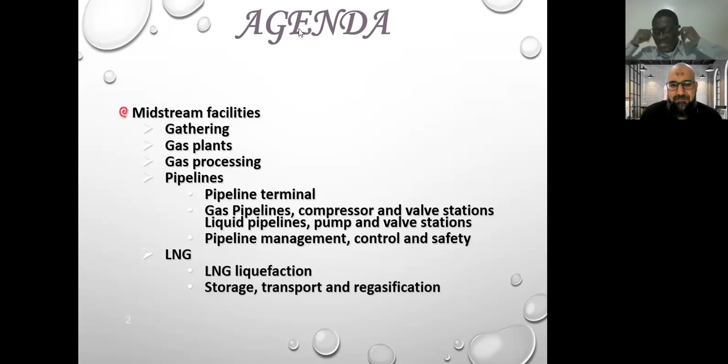Okay, so today we'll speak about the midstream, as I told. In the midstream facility, if you can see in this photo, we have processing plant, we have liquefied natural gas, we have the gas gathering, and we have pipeline in the midstream. So this midstream is mainly about gas processing, gas plant, and the pipeline to carry and transport the gas, and gas manifold and valve manifold, gas station, compressor station. This is all in the midstream sector before going to the final refinery or transporting product for the downstream for the market.

This again is a photo for the midstream sector. As I told you, the gas that is being explored or extracted, it is not a pure gas. So it has some impurities, some components like water and other components that are not useful. So they cannot transport immediately the gas that's coming from the well to the market or to another country. So they have to do some processing. This is mainly the midstream, to do some processing to the gas coming from the well, because it is not a pure gas.

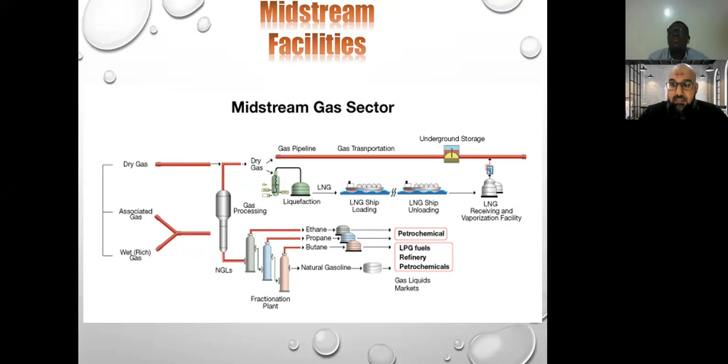So this is what I just explained, that the raw natural gas from the well consists of methane as well as many other smaller fractions of heavier hydrocarbons and other components. So the gas has to be separated into marketable fractions and treated to trade specification to protect equipment from contaminants. So to meet this specification of the gas, they have to do some gas treatment before they sell to the market. So this is all from the midstream sector.

Here, the upstream, if you see this drilling well, and we all studied this one, either we have natural gas or we have crude oil. The natural gas goes through gas treatment. The dry natural gas can go easily to the pipeline and then storage. The wet natural gas needs gas compression, gas processing, because it is unprocessed natural gas. It has some components, so it needs to be processed first.

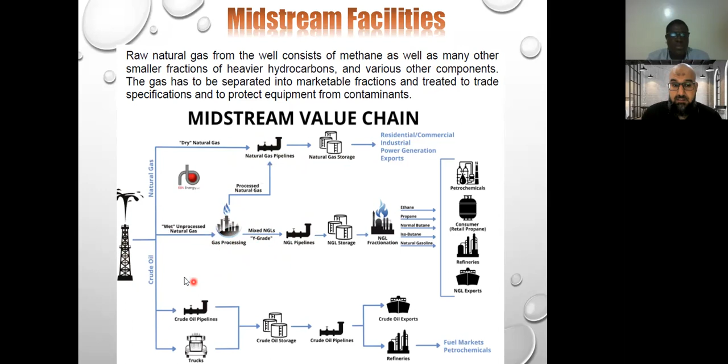So after completion of the gas processing or gas treatment, pure gas will go here to this section, then it will go to the market without any problem. This also happens with the crude oil. So from the well we have either gas or oil. This also happens to the oil, the same philosophy.

So what's meant by gas gathering for the midstream? It means that they have many flow lines connecting together to the well pad. This is to gather all the gas from the wellhead and from the well source, and it will go to the gathering station. This is mainly applied in the first step after completion of upstream and starting of midstream. They start to gather the gas, connecting together.

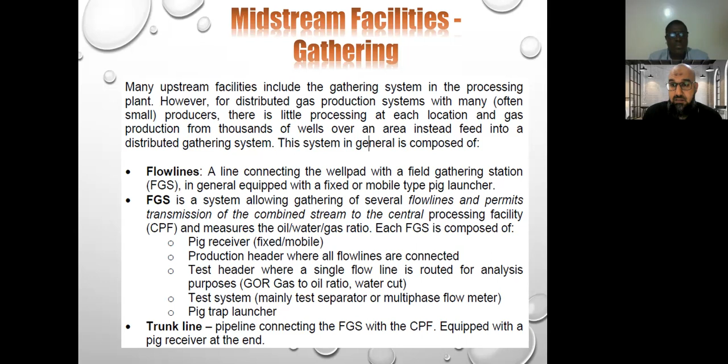They have very big equipment like a launcher, and this launcher is equipment that allows the gas after gathering to be connected into this launcher, then it will be connected to the pipeline. So here is another photo of how they gather the gases from the well. Here is gas gathering by pipeline from the wellhead. This is all connecting from the wellhead, and all of them are processes of gas gathering. Before going to the processing facility, they have to gather the gases by pipeline.

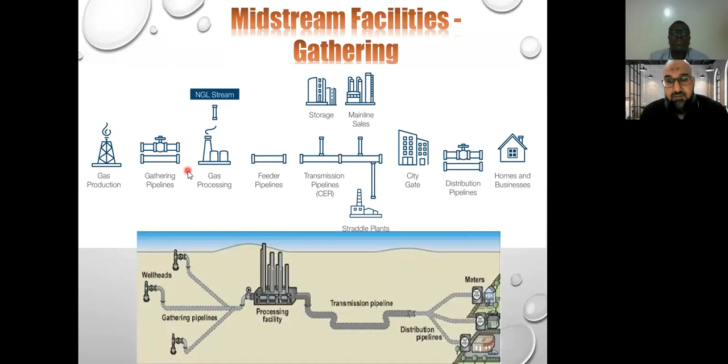So here is another photo. Here is gas production from the well, from exploration. After exploration finishes, then this pipeline is for gathering. After that, they will go to process the gas. So why do we need to process the gas? We have now reached this stage, gas processing. For the next slide, let's speak about the gas plant.

As I told you, this gas is not pure, so they cannot use it. They have to remove the unwanted components. There are unwanted components from the well that already exist in the ground, such as hydrogen sulfide and carbon dioxide. These gases are called acids. So they want to remove them before selling to the market. So this is called gas treatment. In gas treatment, they also do calibration.

Why do they need to do calibration? To meet specific requirements for the market. They need to have some specification of the gas, and to do this, they have to do calibration. So again, the gas treatment or gas plant is mainly to remove the unwanted material like hydrogen sulfide, water, carbon dioxide, nitrogen. All of this unwanted material is not required and does not meet the gas specification required in the market. So they have to remove it and do calibration in the gas plant or gas processing to meet the gas specification requirement.

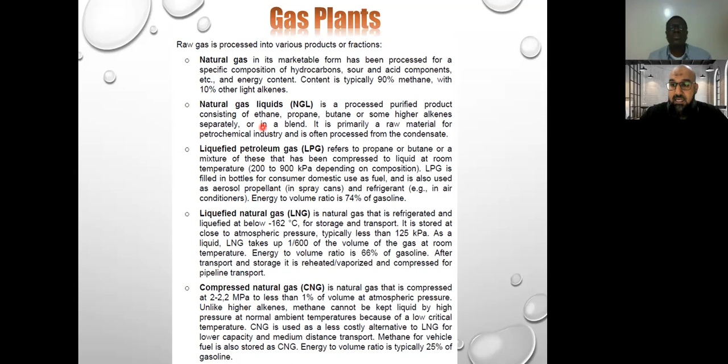So these are the types of product after processing natural gas. We have natural gas, and we have liquefied petroleum gas. This liquefied petroleum gas is what we use in our home, mainly in the kitchen for cooking. We also have liquefied natural gas, and compressed natural gas. So all of these products are finalized after the gas treatment. After you finish the gas plant, you have many products.

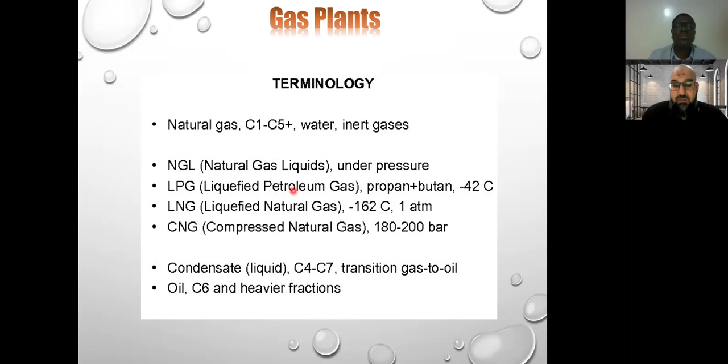As you see, natural gas liquids is under pressure. We have liquefied petroleum gas, which is mainly propane and butane. We have liquefied natural gas, which is under very low temperature; it reaches minus 162 degrees to be liquefied. Then we have compressed natural gas, at 180 to 200 bar pressure. And we have condensate liquid, oil, and other heavier fractions. So this is another photo of the products processed from the gas plant.

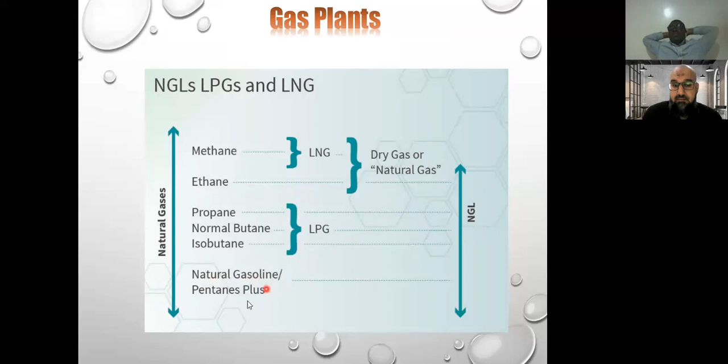As I told you, in natural gas we have methane. This methane can be liquefied to be LNG, liquefied natural gas. We have ethane, propane, butane, isobutane; these are all liquefied petroleum gas. So LPG is liquefied petroleum gas. LNG is liquefied natural gas. NGL is natural gas liquids: natural gasoline and pentanes plus. So these are all the products, as you can see in this photo.

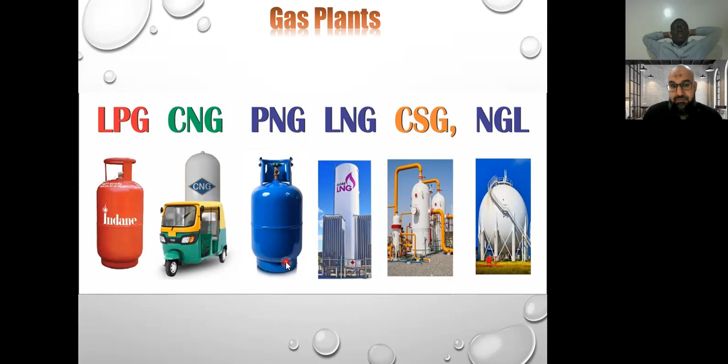The LPG is used in our home. Compressed natural gas is also used in small vehicles or small motorcycles, which in our country they call tuk-tuk. I don't know what it's called in your country. So this uses compressed natural gas. This is liquefied natural gas, and so on.

So this is also another photo of the removal of the unwanted material, the unwanted material that's going to be extracted from the gas.

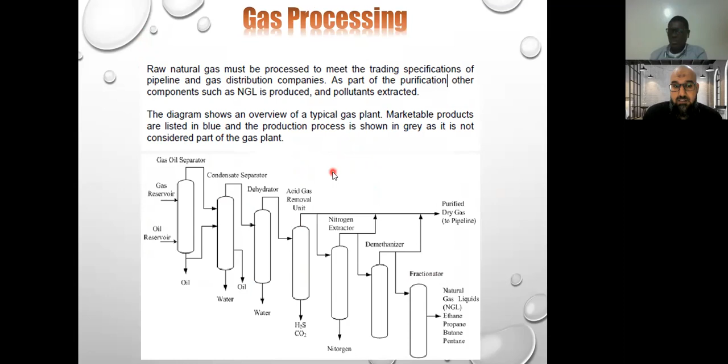Okay, let's have a video that explains the process of the removal of this.

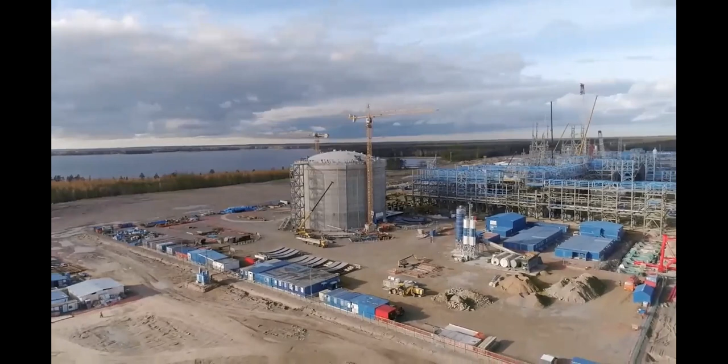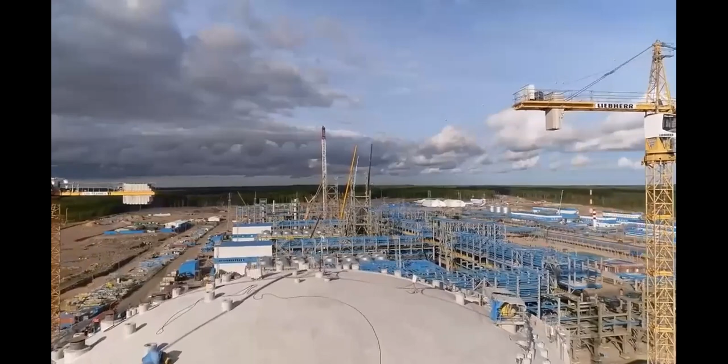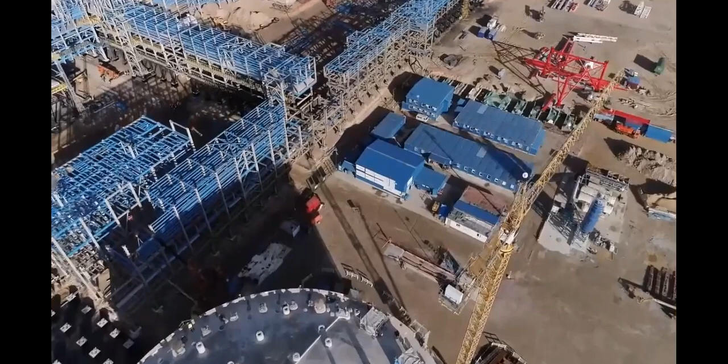Liquefied natural gas technologies from Linde are setting new reliability and efficiency benchmarks. My name is Mark Scheer and I'm Vice President for Business Development and Sales for LNG and gas processing plants. The heart of every LNG plant is the liquefaction technology, together with the main cryogenic heat exchangers. Linde's innovative Limum technology, a single mixed refrigerant process, was selected for a 1.5 million tons per annum LNG project in Russia's northwest region. This is the second largest LNG plant ever designed and executed by Linde. A 1.5 MTPA LNG plant. That means you have to engineer, procure, deliver, ship, and finally stick together probably about 3 million parts in less than 3 years. That's a huge challenge. My name is Matthias Brüntrup and I'm a project director.

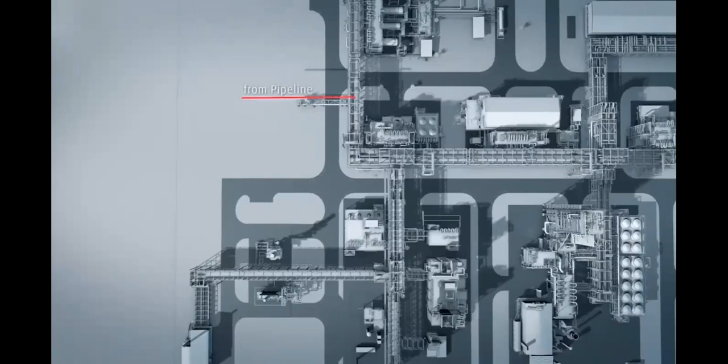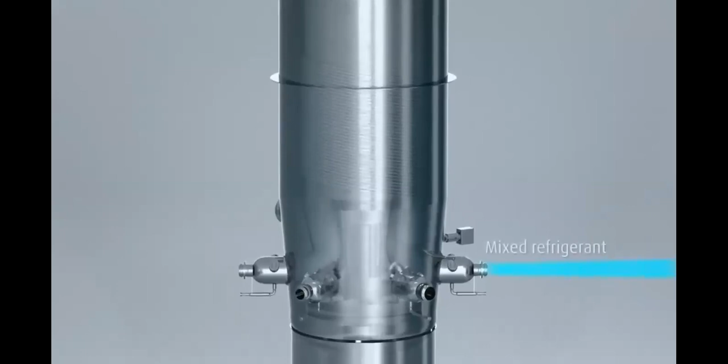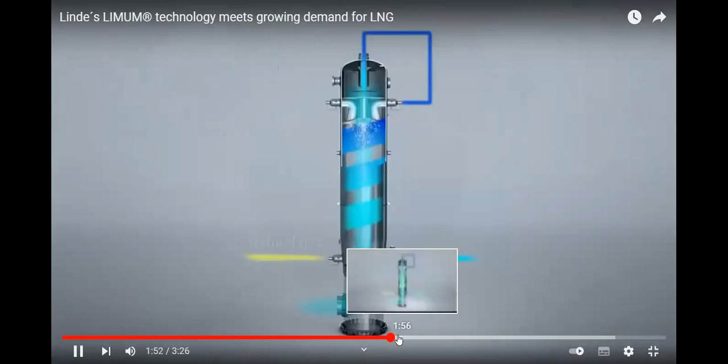Pipeline natural gas is fed into the plant. Various impurities and heavy hydrocarbons are removed first. Then the clean gas is liquefied using Linde's highly specialized and efficient Limum technology. It's like a big fridge in your household, only much larger and colder. My name is Heinz Bauer and I'm Department Head for Conceptual Design Natural Gas Plants. The Limum technology has a minimum equipment count. It is very easy to operate and it has a pretty low energy consumption for this size of plant, which amounts to only 8% of the energy which is brought into the system by natural gas. In this plant, the gas is liquefied in a coil-wound heat exchanger. This equipment is custom fabricated by Linde and uses a mixed refrigerant. We have designed and fabricated two full aluminum coils.

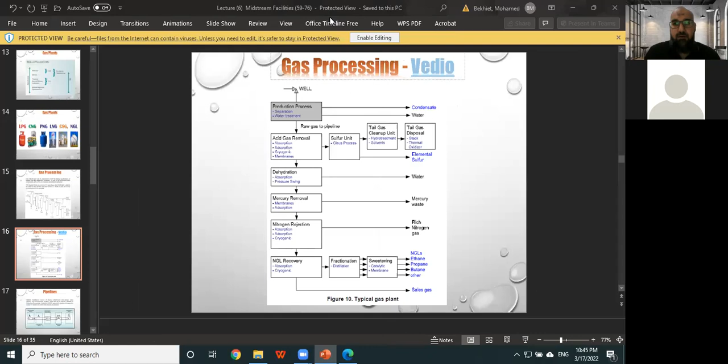Because we are speaking now about liquefaction of natural gas, which we will explain in the next slide. So let's first understand the topic, then we can share the video of how they do liquefaction of natural gas.

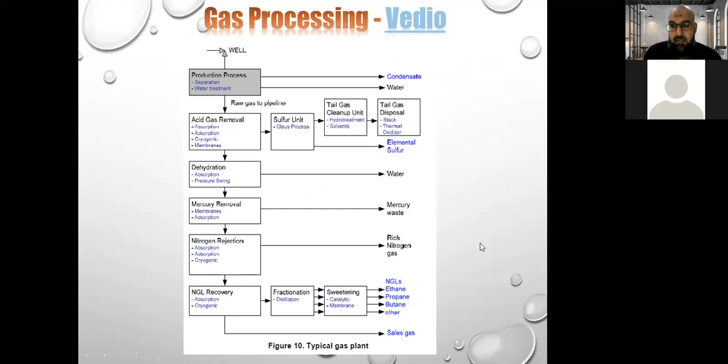So pipeline: now they finish the processing of gas, they remove the nitrogen, they remove the water or unwanted material, they remove everything that is not required. Then it is time to transport. They need to transport this pure gas from the gas plant to the market, to the downstream area. So this is how they transport it, using pipeline. The main purpose of the pipeline is to transport the gas after being treated in the gas processing plants.

The pipeline actually has many components. We can have driver, compressor or pumps. Compressor or pumps, what is the difference? Why are we using compressor and why are we using pump? It depends on the source. If we have a gas, we are using compressor. And here, this is the compressor station, or pump station. We use pump if we have liquid.

Again, this is very important. I may ask this question. Why are we using gas compressor? We are using gas compressor station because we have gases, so it should be compressed. We cannot pump gas. We only pump liquid. So we are using compressor station for gases. What about pump? Pump station is only used if we have crude oil or liquid, to pump the liquid to the other destination.

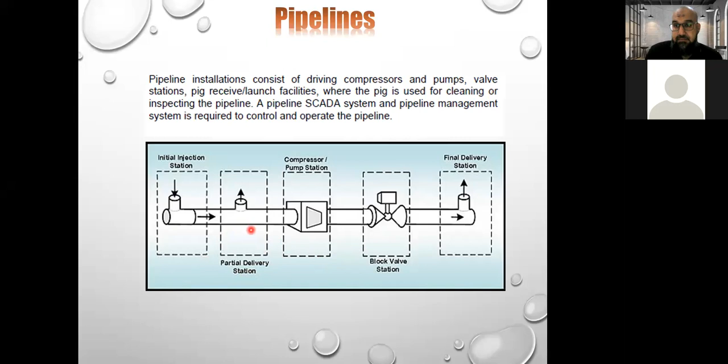So they control all these instruments like pressure transmitter, temperature transmitter, flow transmitter. All these instruments, FT, PT, TT, measure the flow, the pressure, and the temperature. This measurement reaches a remote terminal unit through the SCADA system satellite. So they can use the SCADA network to monitor all the pipeline and all the devices. They can easily shut down the valve here, control the flow, or increase the pressure by using all these devices. It is monitored through the control room.

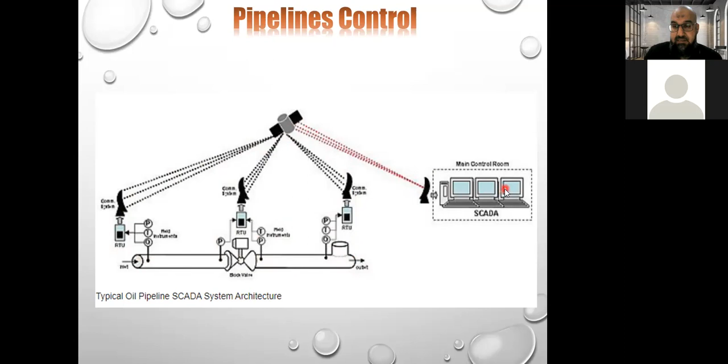This is another photo, a typical oil pipeline SCADA system architecture. So they are using the SCADA system to monitor the devices, to measure the pressure, temperature, or the flow in the main control room. Okay.

So here's what we call the pipeline terminal. This includes the launcher or receiver as a minimum requirement, as I told before. This is the scraper launcher or scraper receiver. It has a pig, and this pig is inserted inside the pipeline for cleaning the pipeline. So how do we remove this small pig? We remove it through the pig launcher or pig receiver.

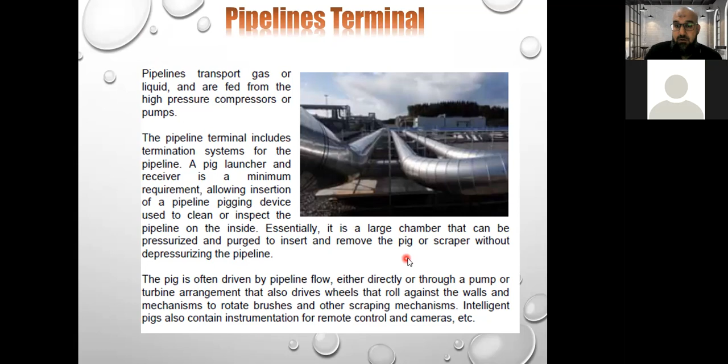So this is the launcher and this is the receiver. This is a typical photo of the launcher and receiver, and here it is installed on the pipeline. If you can see here, for example, this is the pig launcher at the start of the pipeline, so it is installed like this. To control the pipeline, a pig is required to clean the pipeline. So the small pig will be entered from here, and all this is opened until it travels through to clean the pipeline. Then it will be removed again from the launcher or receiver.

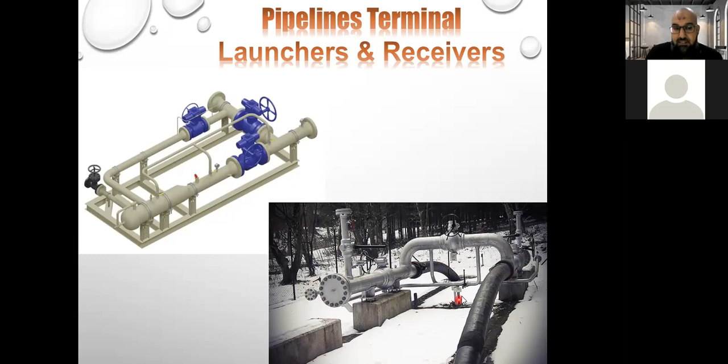In the pipeline, as I told before, we also have the compressor or valve station. So we have a compressor station. Since we are speaking about gas, we have to have a compressor station. So this is a typical compressor station. It actually exists above ground; it is an above ground facility. And this compressor station is required to what?

To increase the pressure. Because what happens? The pressure will drop along the pipeline. Since the pipeline is a very huge length, the pressure will drop along the distance. So to increase the pressure again, you have to have a compression station. This compression station is required to increase the pressure until it reaches the final terminal or final destination.

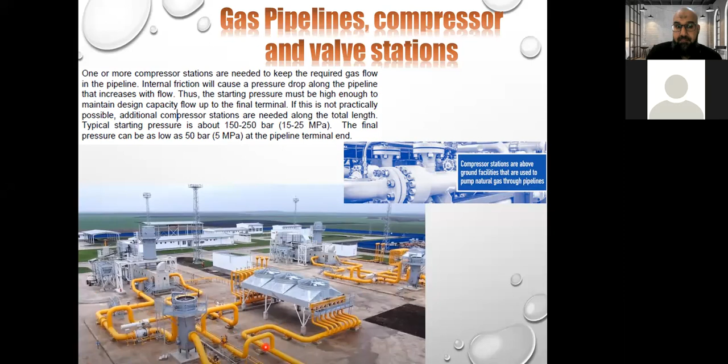We have to have a pig launcher or receiver. We have to have a compressor station for gases. We have to have a pump station for liquid. We have to have a valve station. This valve station is a group of valves, either isolation or shutdown valves, for the safety of the pipeline. If, for instance, the pressure increased dramatically, we have a shutdown valve to shut down the flow, to stop the flow from passing. So we have to have a valve station here.

And we have to have a metering station. This metering station is to measure the flow. Metering mainly is to know the flow before we sell to the market.

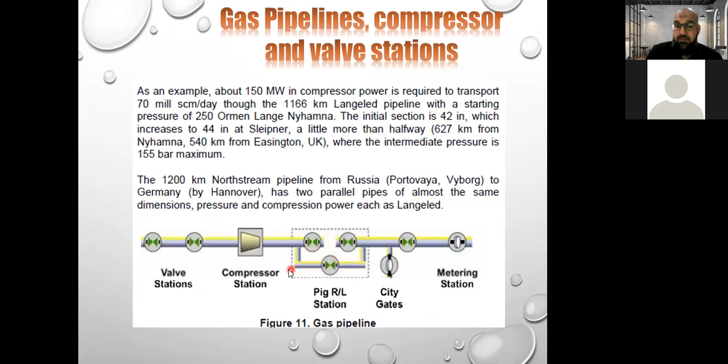So as I told, the valve station is very important. So we have to have many groups of valves here. This valve station is to allow closure of the flow, to monitor the flow. And also it's required that this valve station is operated remotely.

So we cannot operate this valve station from the field. So it is operated remotely by remote control through the control room by using the SCADA system. So we have to monitor this pipeline remotely.

Maybe it can have different pump stations. Maybe pump station number 1, pump station number 2, pump station number 3, along the pipeline until it reaches the final destination. We have to have pump stations to pump the liquid to increase its pressure.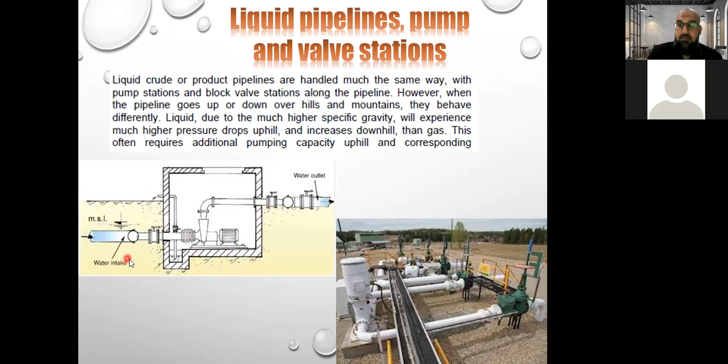Again, we have to have a pump station for liquid or a compressor station for gases. We have to have a valve station for monitoring or isolating or shutting down the flow. We have to have a tank at the end to store the liquid.

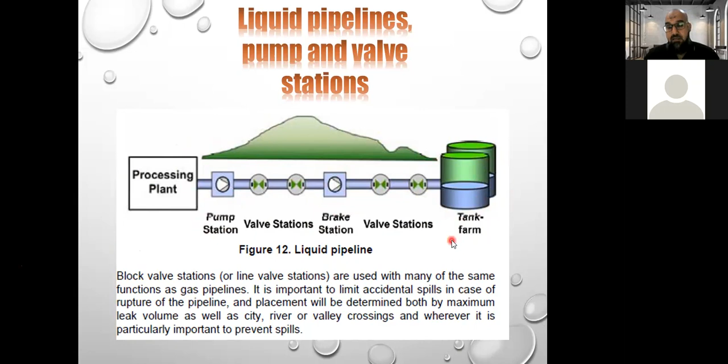So let's see one video again about a natural gas compressor station. How the processing is mainly working and how it works actually in the real industry.

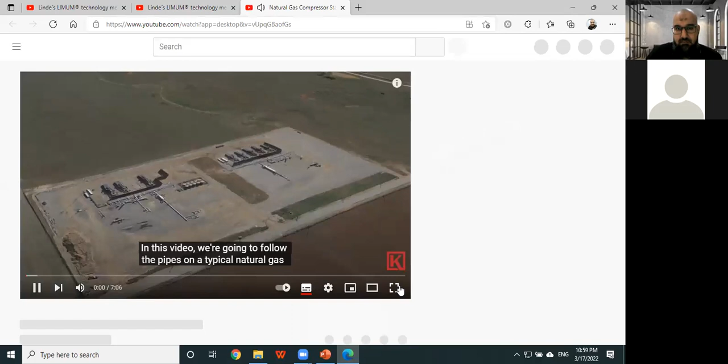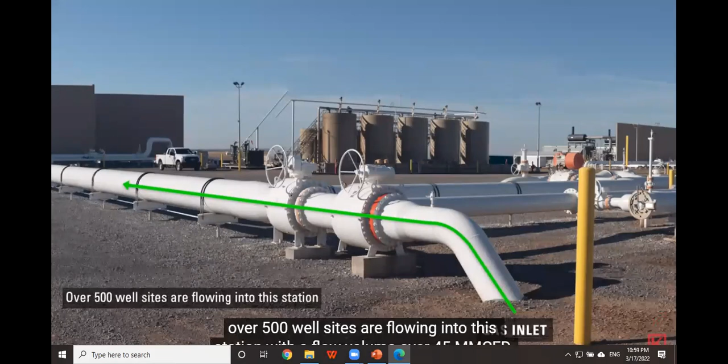In this video, we're going to follow the pipes on a typical natural gas compressor station and explain how each piece of equipment works. This is the inlet pipe on the compressor station. The pipe coming from underground carries natural gas from many different sites. At this point, over 500 well sites are flowing into the station with a flow volume over 45 million cubic feet per day. Also, leading into the main inlet on this site are two pig receivers from two different lines.

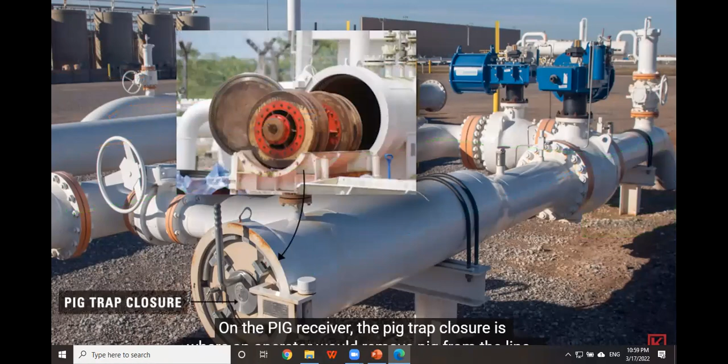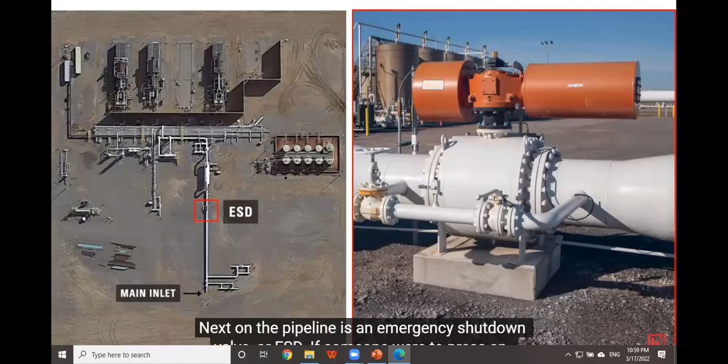All of the process fluid that the pig is pushing through the pig launcher moves into the main inlet pipeline with the natural gas. On the pig receiver, the pig trap closure is where an operator would remove the pig from the line. The pig sig will indicate that the pig has arrived. Next on the pipeline is an emergency shutdown valve, or ESD. If someone were to press an ESD button, or if the system were to overpressure, this will shut in the system. In the event of an ESD closure, the bypass line will be used to slowly increase the pressure to resume operation, so the system is not pressurized too quickly during startup.

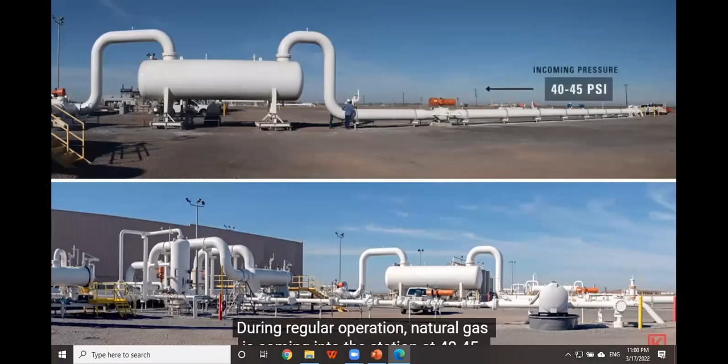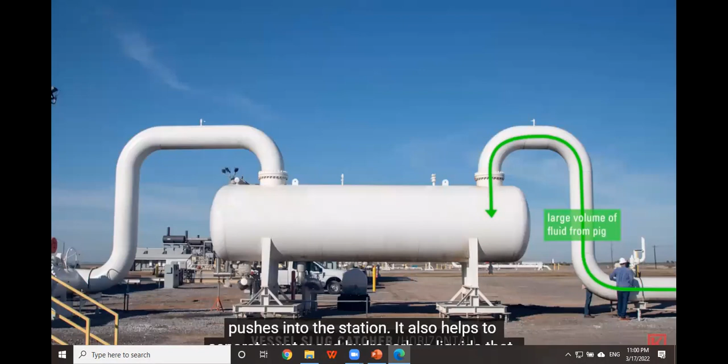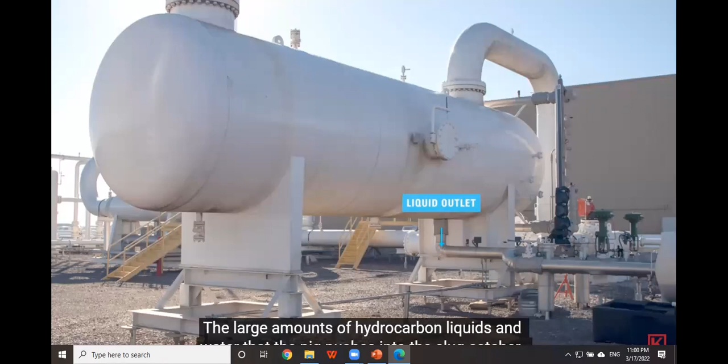During regular operation, natural gas is coming into the station at 40 to 45 psi. When leaving the station, the final pressure will be between 1250 and 1300 psi. The slug catcher is designed to handle the large volume of fluid that the pig pushes into the station. It also helps to separate water and hydrocarbon liquids that may condense out of the gas stream as the gas cools and moves through the pipeline. The large amounts of hydrocarbon liquids and water that the pig pushes into the slug catcher travel to storage tanks on this location. At this point, a site may use an emulsion breaker to aid this separation process.

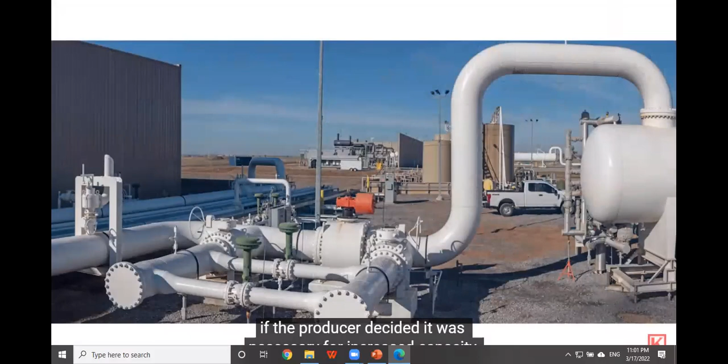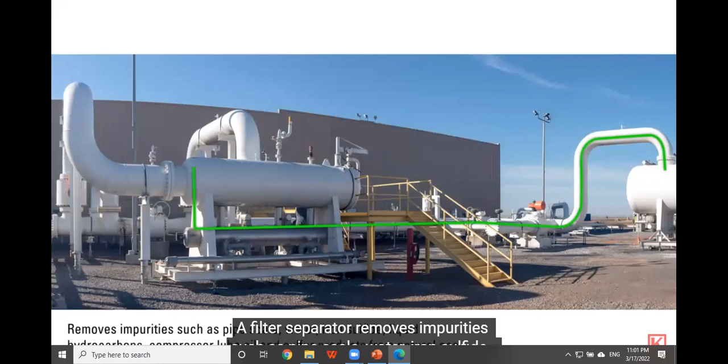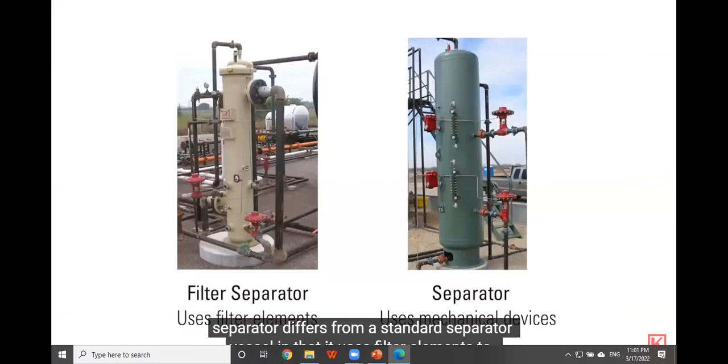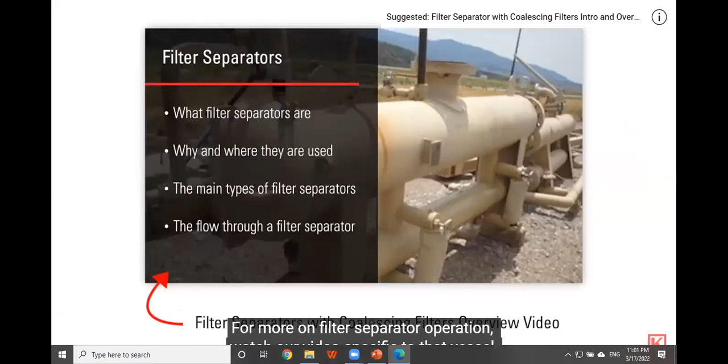After the slug catcher, you may notice more pipes with empty end connections. This station is built to be modular and allow for other equipment to be added in the future if the producer decided it was necessary for increased capacity. After much of the initial fluids have been removed, the natural gas moves into a second vessel, a filter separator. A filter separator removes impurities such as pipe scale, water, iron sulfide, liquid hydrocarbons, compressor lube oil, and sulfur products from natural gas. A filter separator differs from a standard separator vessel in that it uses filter elements to remove contaminants rather than using mechanical devices and other principles of separation. For more on filter separator operation, watch our video specific to that vessel.

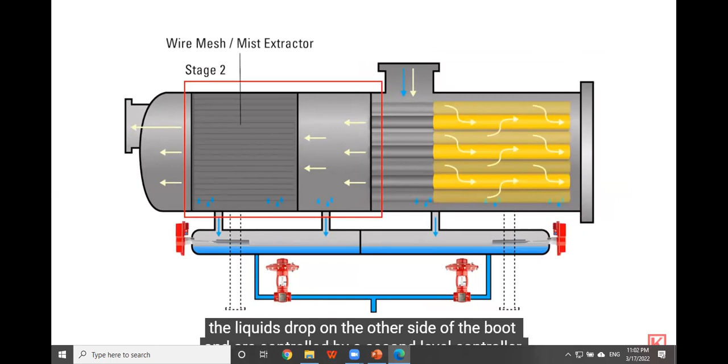This filter separator has a liquid boot design where the liquids fall into a lower portion of the vessel. This is a two-stage separator. In the first stage, liquids fall out and their levels are controlled by this level controller. In the second stage, when the gas passes through the filters, the liquids drop on the other side of the boot and are controlled by a second level controller. The gas then flows into the suction header and into the individual inlets for each compressor.

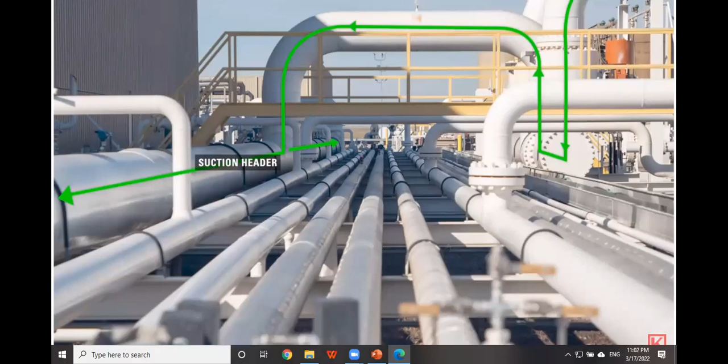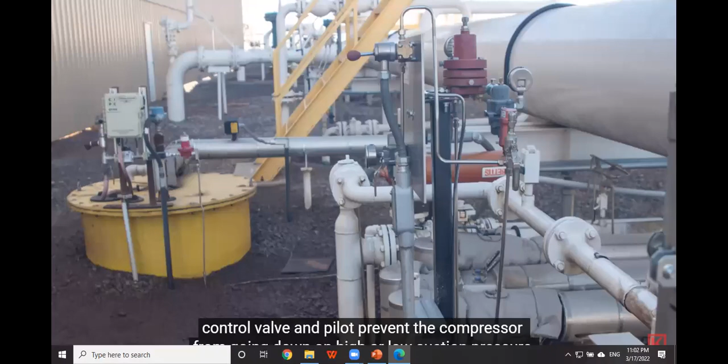This pilot is monitoring and controlling the suction of the compressor. The compressor operates most efficiently in a certain window of conditions. The suction control valve and the pilot prevent the compressor from going down on high or low suction pressure. After the suction control valve, the natural gas travels through underground pipelines into the inlet scrubber of the compressor that is located on the other side of a sound barrier wall.

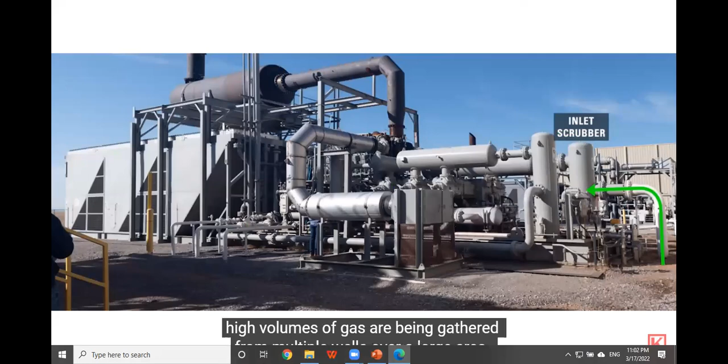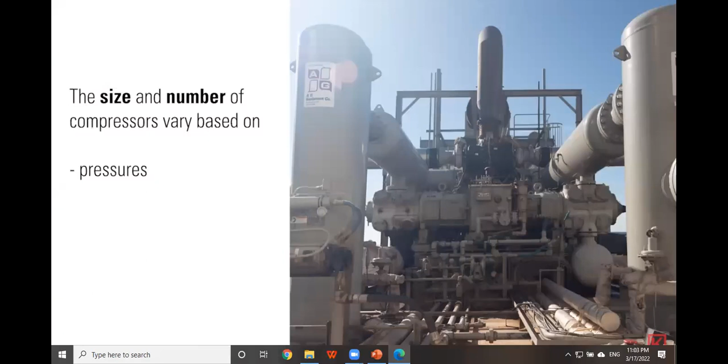Large compressors like these are found at compressor stations where high volumes of gas are being gathered from multiple wells over a large area or from a large pipeline. These stations help move gas from one side of the country to the other. The size and number of compressors found at these stations vary based on the pressures, volume of gas to be moved, and the distance it must travel to the next station. You can learn more about the function and flow path of compressors with our other videos specific to that topic.

Okay, I think this now is good to know about the natural gas compression station and why we are using the compression station, as he mentioned in the video, to compress the gases to the next station or the next terminal or destination, mainly to increase the pressure of the gas. So let's go to the next topic about LNG, liquefied natural gas.

All right, this is mainly methane. So the gas here for the liquefied natural gas is methane, CH4. C is carbon, H is hydrogen. So we have 4 of hydrogen and 1 of carbon, mixed together to have CH4. And this is the methane actually. This is the natural gas. So this natural gas, they are doing what? Liquefaction. They change the phase of the gas to be liquid.

So why are they doing this? Why do they convert the gas to liquid? This is mainly for easy transport and storage. It is easier for the liquid to be stored and transported. So imagine that they have to transport or store huge amounts of natural gas, and they want to transport it to many countries all over the world, overseas. It is not possible to store the gas, so they change the phase to be liquid, so it will be easy to store and transport.

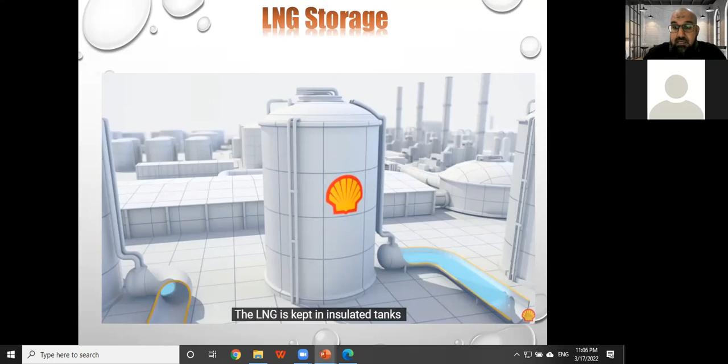And this is definitely using many processes of liquefaction. It's mainly like a fridge in our home, or air conditioning. We are using a compressor or condenser or heat exchanger. This is mainly to change the phase of the gas to liquid. Change the phase from gas to liquid. And at the end, it can easily be stored in insulated tanks. As you can see here, this has become liquid. The gas becomes liquid and can be easily stored in insulated tanks, as you can see here in the photo.

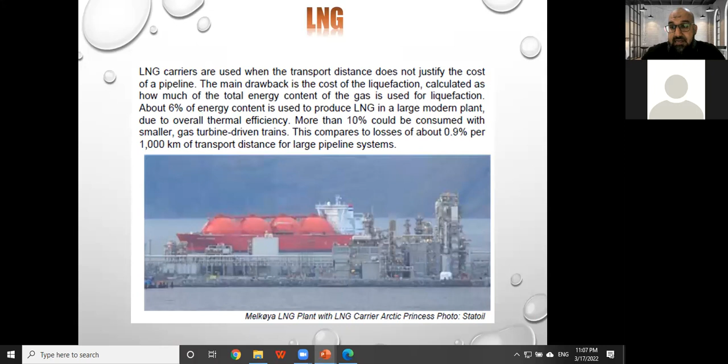So this is very important, the liquefied natural gas. Its carriers are used when the transport distance doesn't justify the cost of a pipeline. So here, they are using the carrier or the ship to transport this liquefied natural gas over the seas to many other locations, plants, or countries. They are using the ships or carriers to transport large volumes of this liquefied natural gas, of liquid actually, then they can reach the destination. After that, they can transfer the liquid to gas again. Let's see this video and how they transfer the gas to liquid.

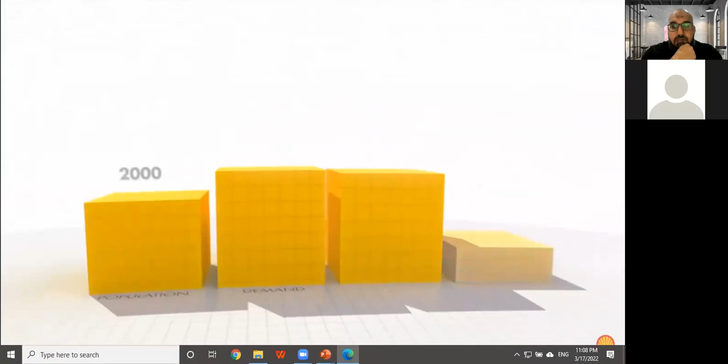The world's population is growing, and for many, living standards will continue to improve. As a result, global energy demand is expected to double by 2050 when compared to 2000. To help meet this demand, gas will form an increasingly important role. Natural gas is plentiful, and it's the cleanest burning fossil fuel.

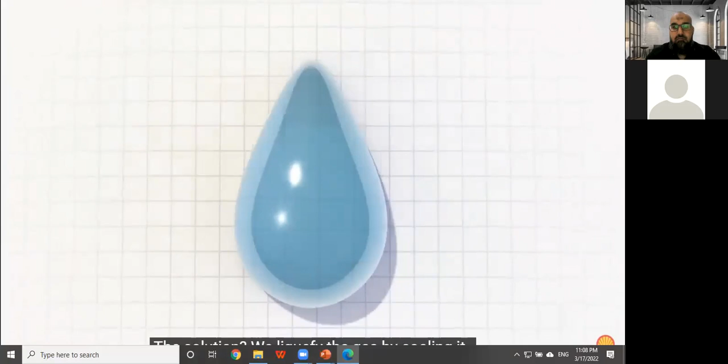But some natural gas resources are in remote locations. Transporting the gas long distances by pipeline can be costly and impractical. The solution? We liquefy the gas by cooling it, which shrinks its volume for easier, economical, and safe transportation by ship. So how is liquefied natural gas produced? Natural gas extracted from the ground contains impurities, water, and other associated liquids. First, it is processed to clean it.

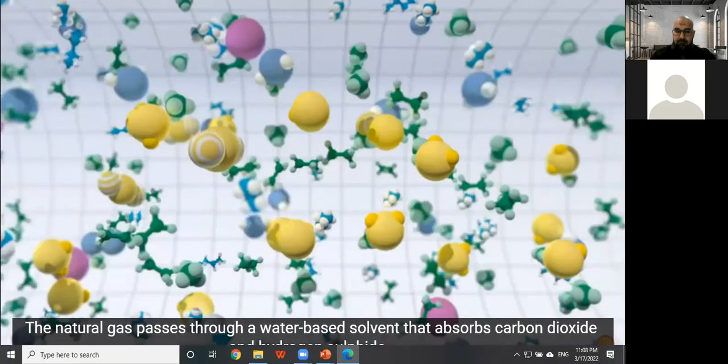It goes through a series of pipes and vessels where gravity helps separate the gas from some of the heavier liquids. Other impurities are then stripped out. The natural gas passes through a water-based solvent that absorbs carbon dioxide and hydrogen sulfide. These would otherwise freeze when the gas is cooled and so cause blockages. Next, any remaining water is removed, as this would also freeze.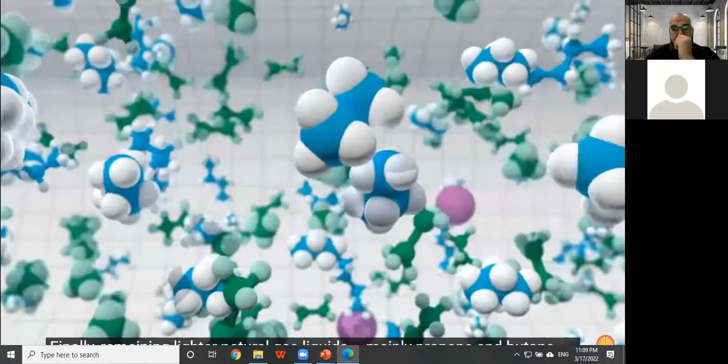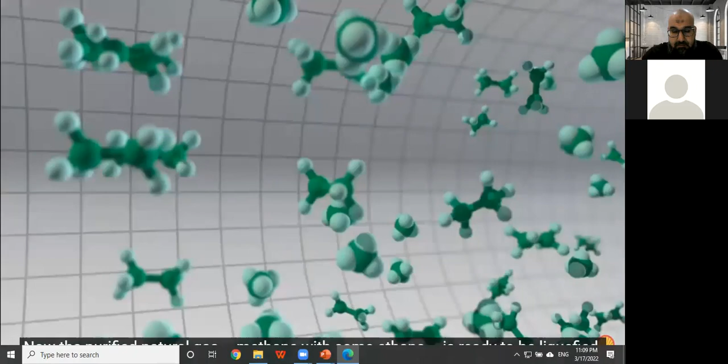Finally, remaining lighter natural gas liquids, mainly propane and butane, are extracted to be sold separately or used as a refrigerant later in the cooling process. Traces of mercury are also filtered out. Now the purified natural gas, methane with some ethane, is ready to be liquefied. This happens in heat exchangers.

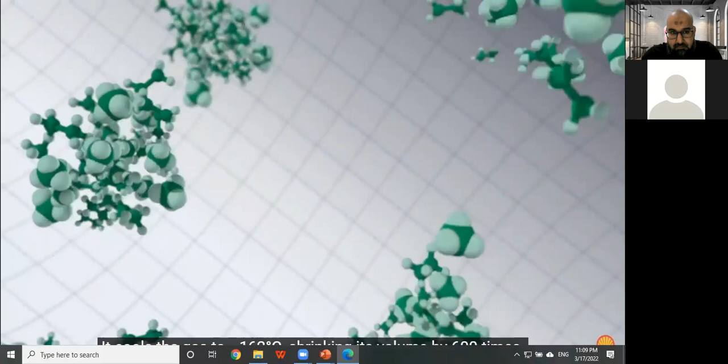A coolant, chilled by giant refrigerators, absorbs the heat from the natural gas. It cools the gas to minus 162 degrees centigrade, shrinking its volume by 600 times. This turns it into a clear, colorless, non-toxic liquid, liquefied natural gas, or LNG, that is much easier to store and transport. The LNG is kept in insulated tanks until it is ready for loading into a specially designed LNG ship or carrier.

Okay, so this is how they are doing this processing for liquefied natural gas. They cool the gases, they reach the temperature minus 160 degrees. So first they remove all the impurities, they remove the water, because if they cool the gas with water, the water will freeze, so it cannot help the gas to be transferred to liquid. It cannot be transferred to liquid easily.

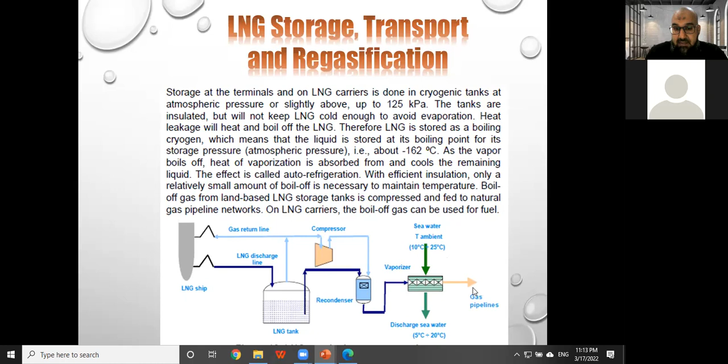So this is how they store the LNG in the tanks. These are our LNG tanks, cryogenic tanks. And this is the carrier. And this is the end user, after they do the regasification, they change the liquid again to gas so that it can be easily used in the market.

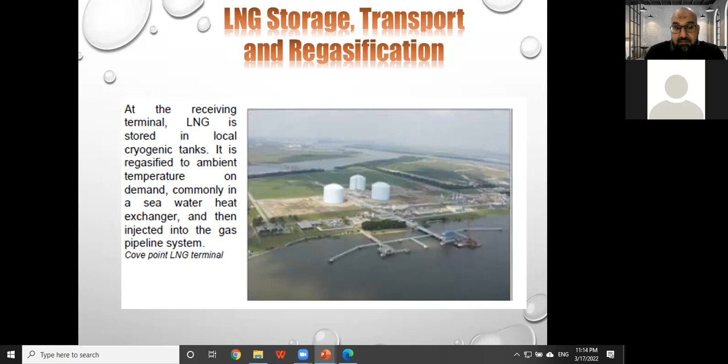So let's see another video, and this will be the last before we finish our lecture today.

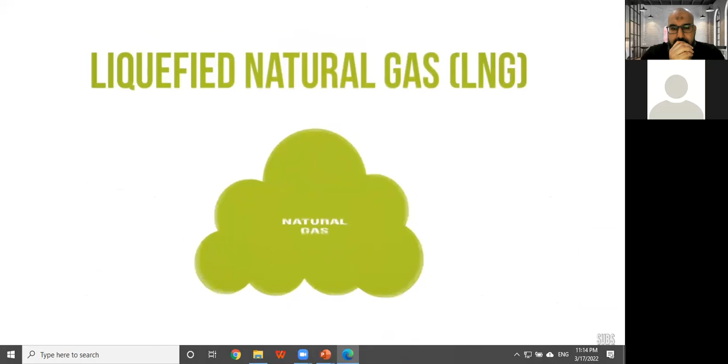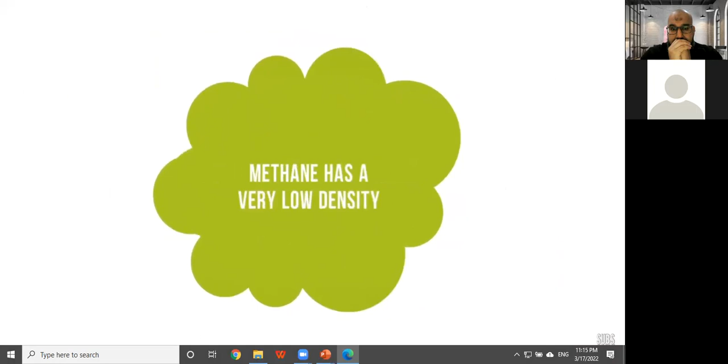LNG, liquefied natural gas, is natural gas that has been cooled to at least minus 162 degrees Celsius to transform the gas into a liquid for transportation purposes. To understand why liquefying natural gas is important, we first need to understand natural gas's physical properties. Methane has a very low density and is therefore costly to transport and store. When natural gas is liquefied, it occupies 600 times less space than as a gas.

Natural gas pipelines can be used to transport gas on land or for short ocean crossings. However, long distances and overseas transport of natural gas via pipeline is not economically feasible. Liquefying natural gas makes it possible to transport gas where pipelines cannot be built, for example, across the ocean.

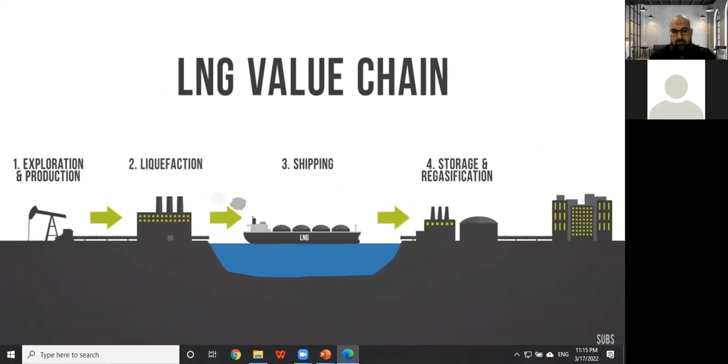The four main elements of the LNG value chain are: 1. Exploration and production, 2. Liquefaction, 3. Shipping, 4. Storage and regasification. At the receiving terminal, LNG is unloaded and stored before being regasified and transported by pipe to the end users.

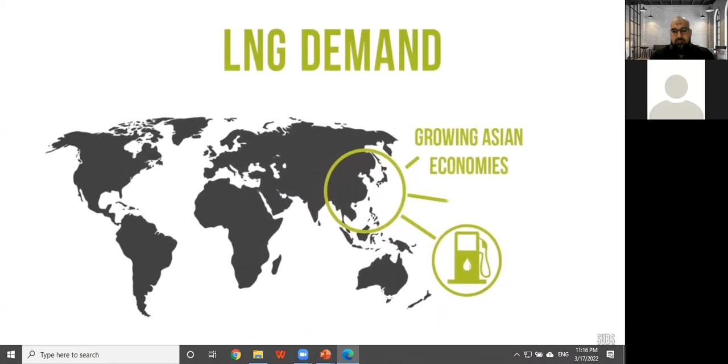The demand for LNG is rising in markets with limited domestic gas production or pipeline imports. This increase is primarily from growing Asian economies and particularly driven by their desire for cleaner fuels and by the shutdown of nuclear power plants. The largest producer of LNG in the world is Qatar, with a liquefaction capacity in 2013 of roughly 1/4 of the global LNG production. Japan has always been the largest importer of LNG and in 2013 consumed over 37% of global LNG trade.

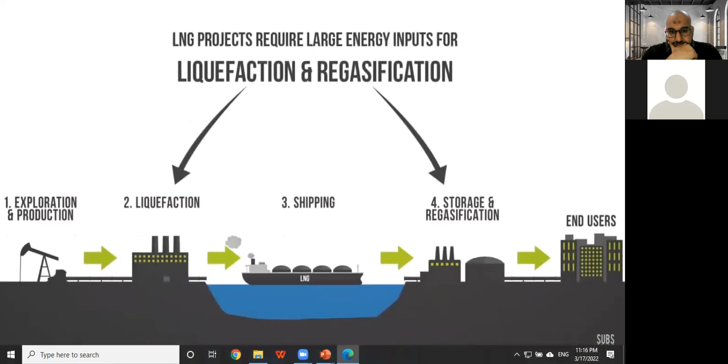The extraction process also has environmental and social issues to consider. LNG projects require large energy inputs for liquefaction and regasification, and therefore have associated greenhouse gas emissions. Spills pose concerns to local communities. There have been 2 accidents connected to LNG, but in general, liquefaction, LNG shipping, storage, and regasification have proven to be safe. LNG projects require large upfront capital investments, which can be a challenge in moving projects ahead. That's LNG. Okay, that's LNG, and that's our lecture today.

So we finished so far, dear brother and sister. Please let me know if you have any questions before we close our session. Before you ask, I will ask. Okay, so be ready for my question. Don't move. First question: what is the difference between gas station and pump station? What's the difference between gas station and pump station?

Mr. Ba, yes, you can answer. Sorry, yeah, I allow you to speak, sorry. Yeah, you can speak now. Mr. Ba, you can speak. Hello? Yes, hello. Can you hear me? Yes, I can hear you. Yes. Mr. Ba, what is the difference between gas compression station and pump station?